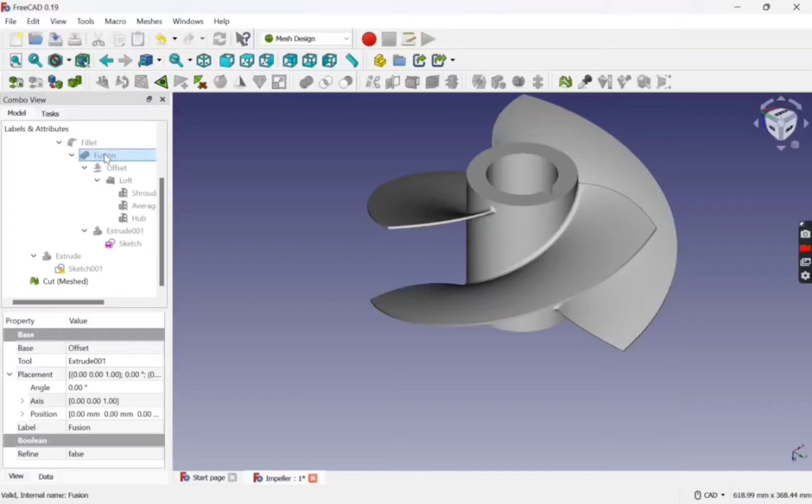Next, I used the Boolean operation to fuse, selecting the blade and the cylinder to fuse together. Next, I selected the different leading edges and used the fillet option to have this rounded shape.

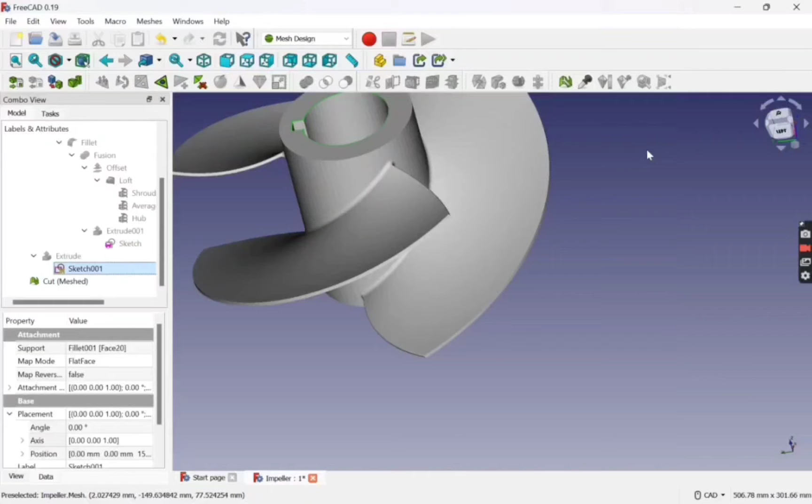Next, for having three different blades, I used the polar array option. Now for having the hole on the middle part, I used the sketcher option, then deleted some lines and used the extrude option to create a solid surface.

Finally, I used the cut option to have the hole, and then used mesh design, and got my impeller.

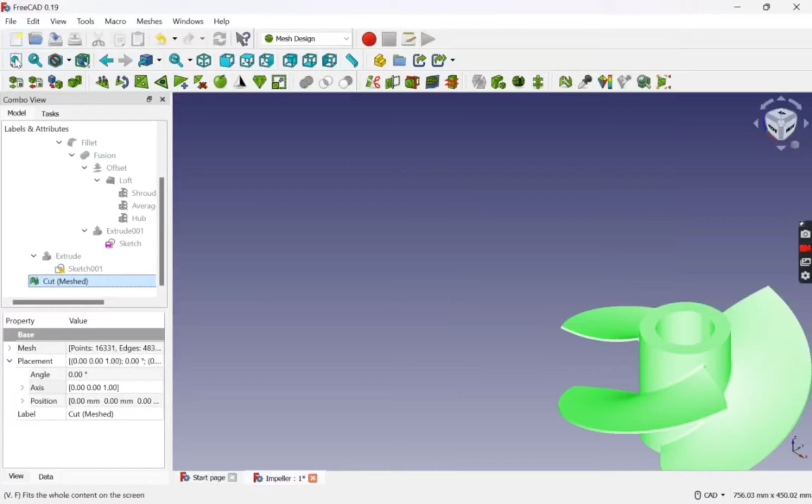Now, after saving this project and creating this STL file, if I open it, it looks like this. I have opened the Cura software, and here is my project.

Now I will select it, move it, and position it like this. I've also scaled it to the required dimension, and the dimension is like this, which is less than the dimension mentioned in the project.

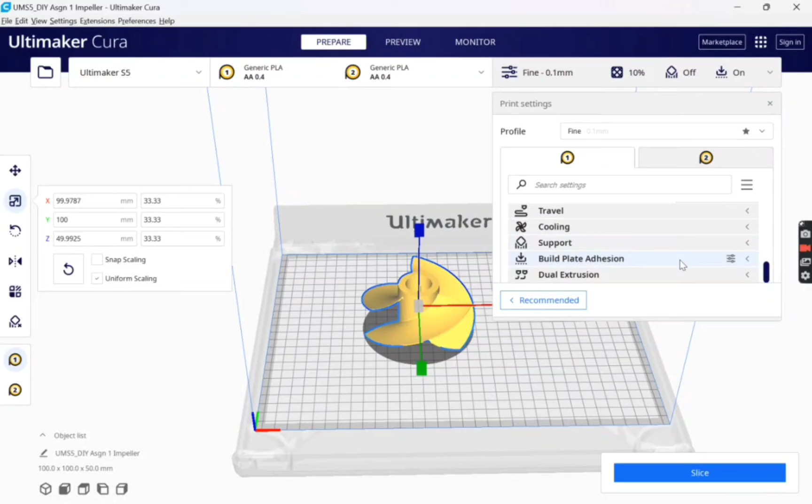Now I will change its specifications. First I will change the infill density to 10%, and here is the speed, that is 60 mm per second. For the top and bottom thickness, it is 0.05 mm.

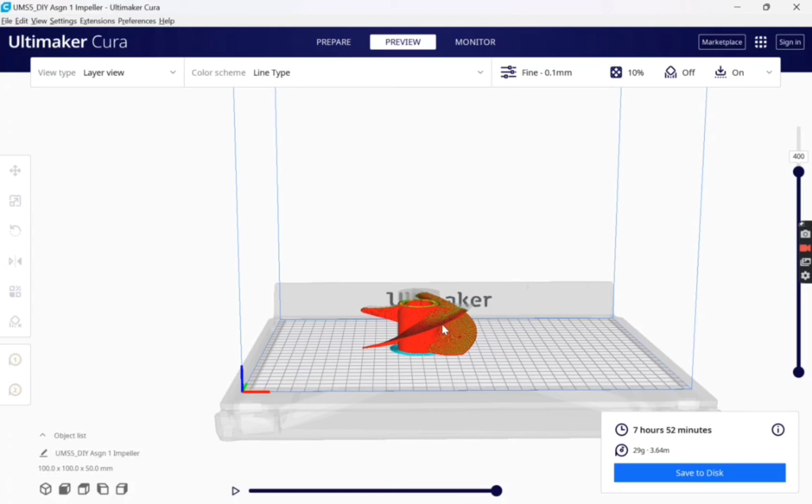Now I will slice it for the estimated time of my project. I'll go to the preview option. As you can see, the estimated time is 7 hours and 52 minutes, which is less than 8 hours. This is how my project will build.

So I think that I have included all the points that were mentioned by my respected professors, and have created a right model for the DIY assignment 1. Thank you.